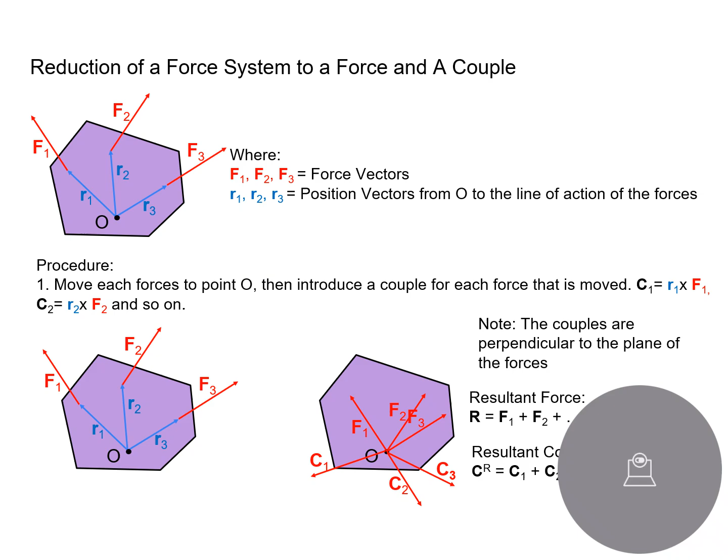So the resultant force vector is the summation of the force vectors F1, F2, and F3. And the resultant couple vector is the summation of the couple vectors C1, C2, and C3. So that's the resulting figure.

The resultant force couple vector R is the summation of the force vectors, and the resultant couple is the summation of the couple vectors. This is dependent on where you set your point O.

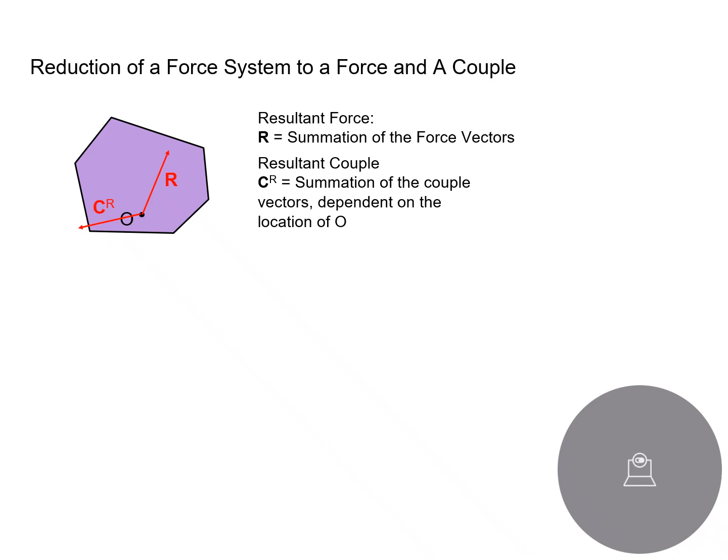For scalar quantities, the x component of the resultant is the summation of the x components of the forces. Same with the resultant along the y-axis and resultant along the z-axis.

The summation of the resultant moment along x is equal to the summation of the moments along the x-axis. The resultant y component of the couple is the summation of the moments along y, and the z component of the resultant couple is the summation of the moments along z.

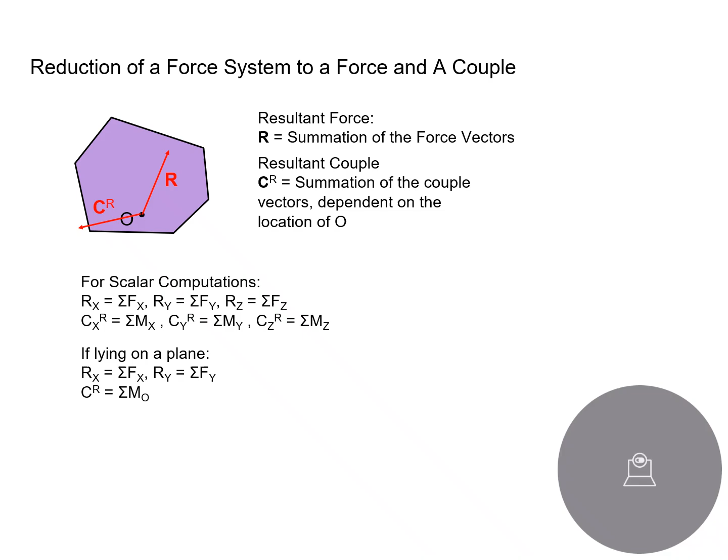If they're in the x and y plane, the resultant x is the summation of the x components of the forces, and the resultant y is the summation of the y components of the forces. The resultant couple is the summation of all their moments.

Problem 1: The force system acting on a structural member consists of the couple C and the forces F1, F2, and F3. Determine the equivalent force couple system with the force acting at point G.

Use C equals 200 pound-feet. F1 is 100 pounds, F2 is 90 pounds, F3 is 120 pounds, and the couple is 200 pound-feet.

What is required by the problem is the resultant force vector R and the resultant couple vector CR.

So for the solution, first we transform force F1 into its rectangular form using its unit vector, lambda.

So, force vector F1 is equal to negative 51.215I plus 76.822J plus 38.411K pounds.

F2 is simply 90I pounds since it only has an X component, with no Z and Y component. While F3 is 120J since it's along the Y axis only.

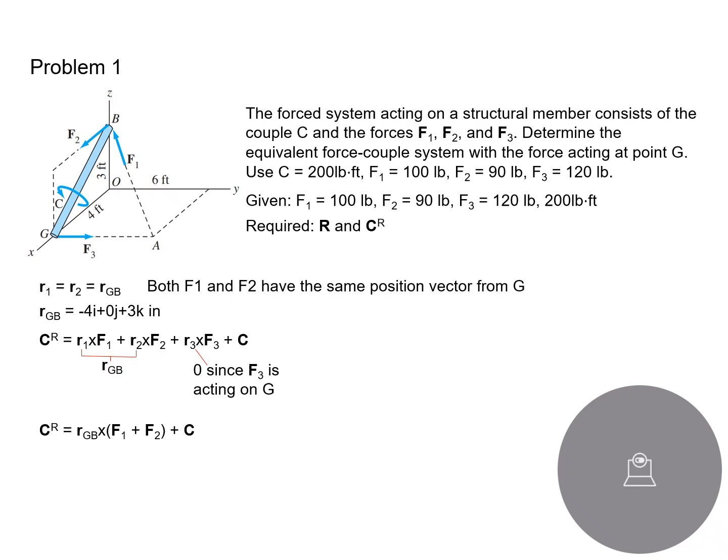So resultant couple is the vector RGB cross product, the sum of force vectors F1 and F2 plus yung couple. Then makukuha natin ang resultant couple vector: 390.466I plus 269.999J plus 187.288.

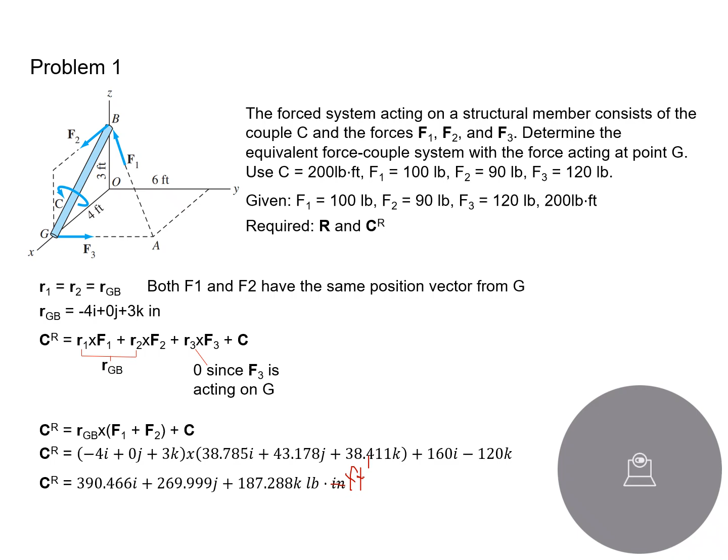Dapat, ano yan? Ano ba to? Feet. Feet dapat yan, hindi yan inches. I-box natin yan. Meron tayong final answer.

Problem 2 naman. The coplanar force system consists of 3 forces and 1 couple. Determine the equivalent force couple system with the force acting at O.

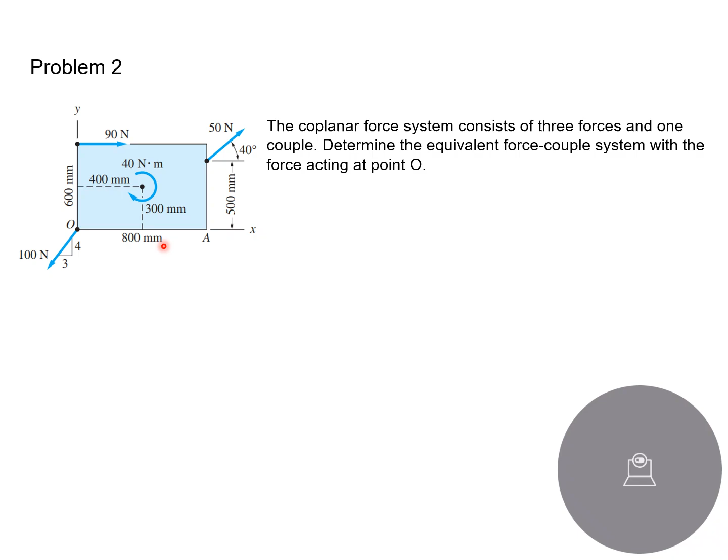So given, F1 is equal to 90 Newton, going right. F2 is equal to 50 Newtons at 40-degree angle with respect to the horizontal, and F3 is 100 Newton. Hindi binigay yung angle, pero binigay yung ratio ng legs ng triangle. And the couple included is 400 Newton meters clockwise.

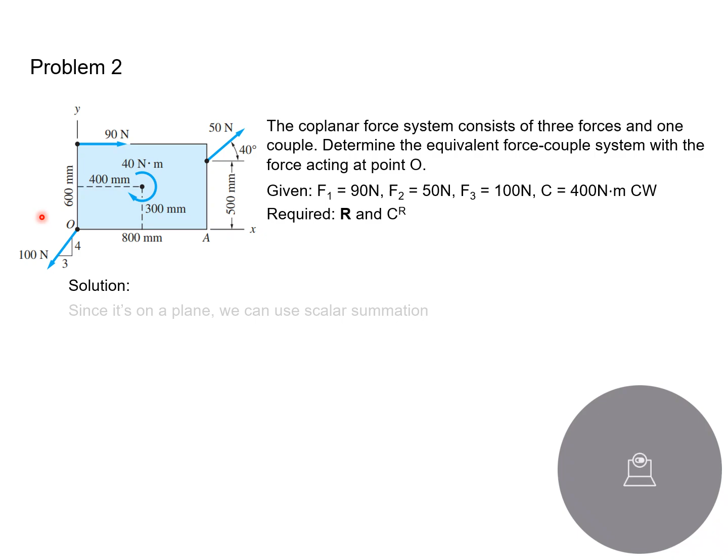So required is the resultant force and the resultant couple. Solution, since it's on a plane, we can use scalar summation.

So the x component of the resultant force is summation of the x component of the given forces. So 90 plus 50 cosine 40 minus 100 na 3/5 of 100 kasi 3-4-5 ang angle. Then we get resultant force along x is 68.302 newtons.

Sa y naman, 50 sine 40 minus 100 times 4/5 is equal to negative 47.860 Newton. So we get our force vector 68.302I minus 47.860J Newtons.

So sa summation naman ng moment, para makuha ng couple, resultant couple, we sum up the moments at point O. So let's say ang sign convention natin ngayon na gagamitin ko for this problem, you can use your own sign convention, is clockwise positive. Dun kasi ang nakasanayan ko.

So 90 Newton times 0.6 plus 50 cosine 40 times 0.5 minus 50 sine 40 times 0.8 plus 40 Newton meter. Hindi ko na sinali tong force at point O kasi wala siyang mabibigay na moment since it passes through point O.

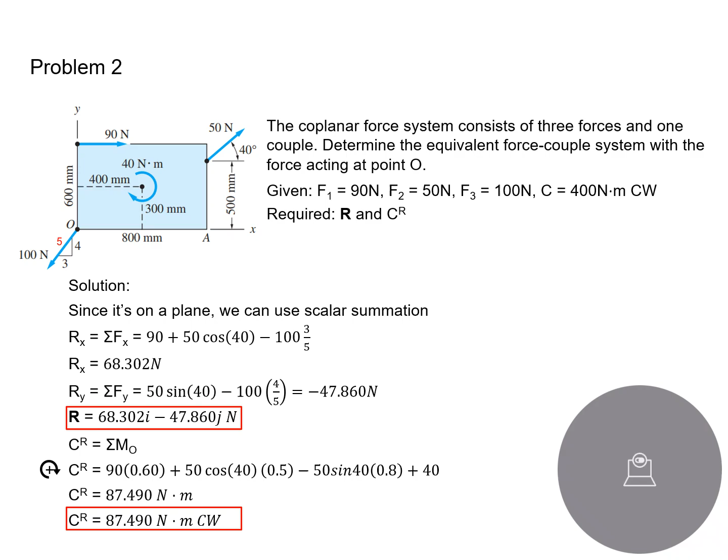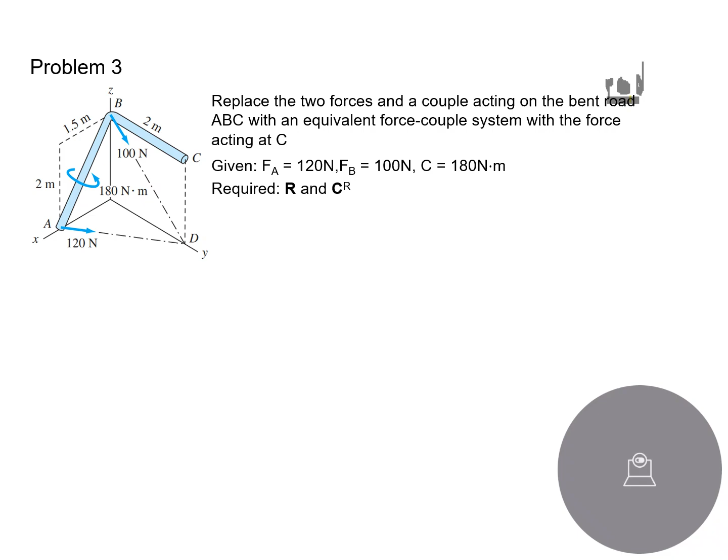So required is the force vector of the resultant vector R and the couple vector C. Solution, kunin natin, transform natin si FA into rectangular form. Alam niyo naman paano, di ba? Yung lambda.

So vector FA is negative 72i plus 96j newtons, while sa FB naman is 70.711j minus 70.711k newtons. Resultant nila, summation lang natin. Force vector FA plus force vector FB is negative 72i plus 166.711j minus 70.711k newtons.

Box na natin. For the couple, gamitan natin ng lambda na method. BA ang lambda nito. Wait, no, AB. Lambda AB, ang direction niya is AB.

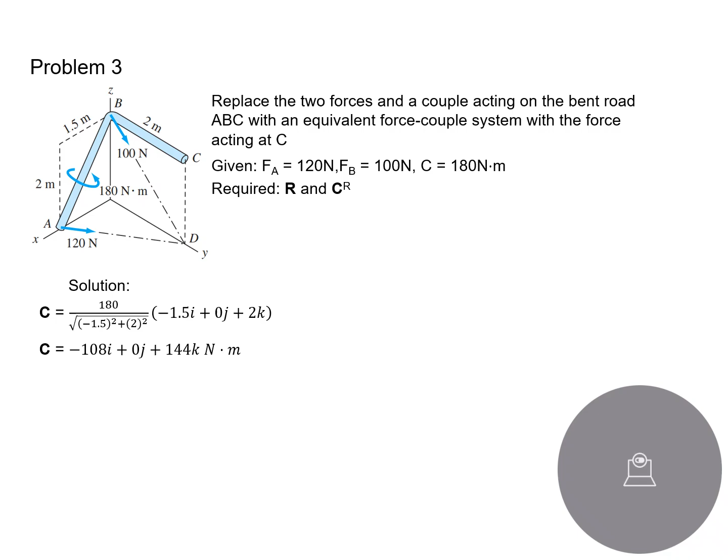Using right hand rule, so the couple vector is negative 108i plus 0j plus 144k Newton meter. Hindi pa ito yung resultant vector. So since both FA and FB intersects point D, we can just use RCD. So RCD is equal to 0i plus 0j minus 2k kasi bumaba lang si CD.

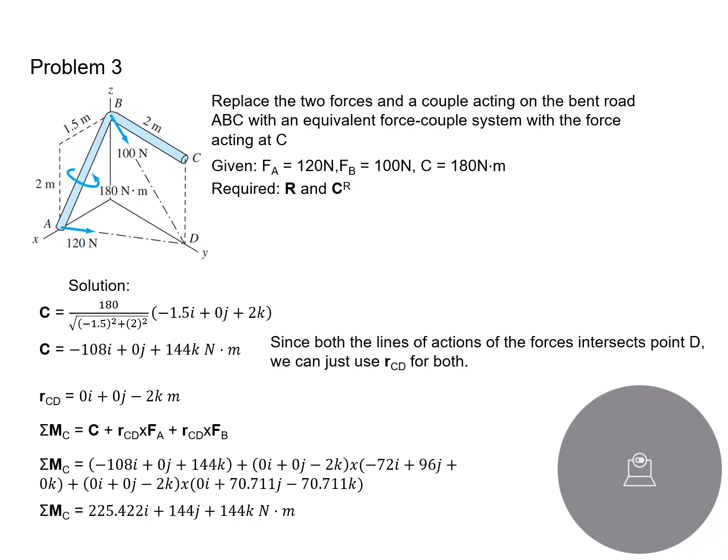Then we can get the summation of their moments: couple vector C na given plus RCD times FA plus RCD times FB. We can obtain the summation of moment at C equals 225.422i plus 144j plus 144k Newton meter. Box na natin.